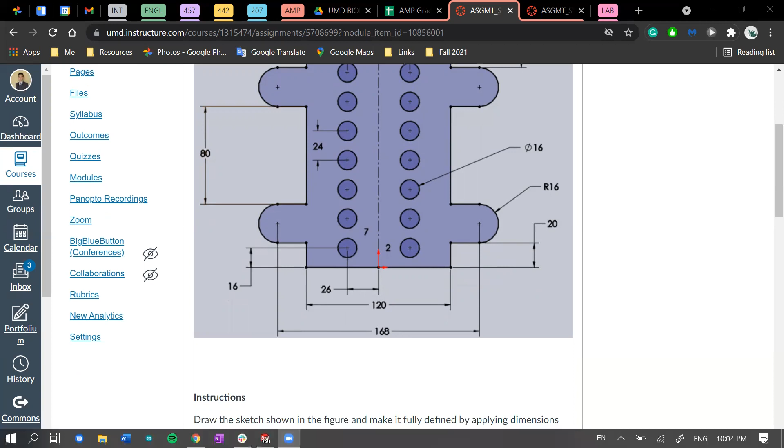Start a sketch. Which plane you choose doesn't really matter. I prefer the right plane or the front plane, just not the top plane for this. There'll be cases where top plane is preferred, but that's for later on.

So again, we mentioned 60. Oh, before we even start, make sure the units of your page, of your environment, is in the proper one. So make sure it's not in inches. Otherwise, you can have a really rough day when you realize halfway through your exam that you're in the wrong units, because the difference between an inch and a millimeter is pretty big. It's just going to screw up your entire sketch essentially. So make sure it's in the right units before you start.

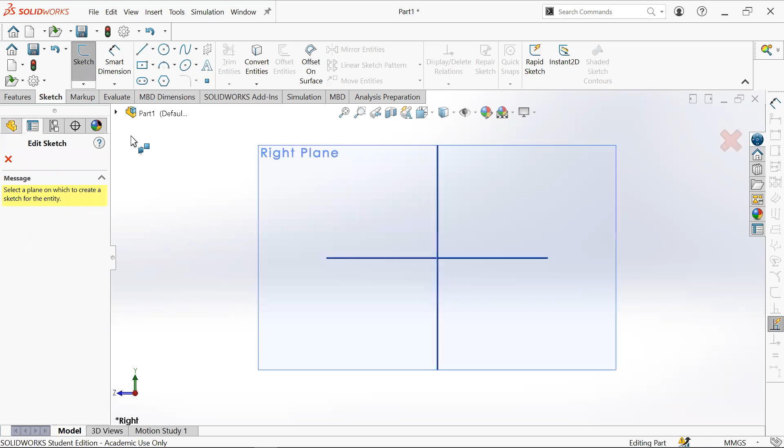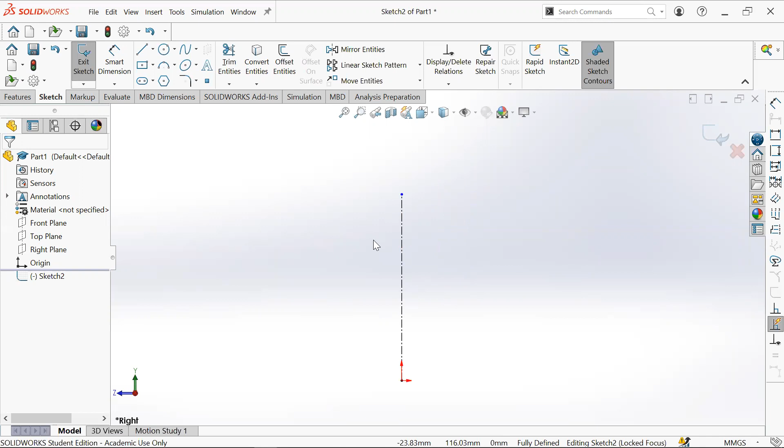And I totally forgot about my own rule even: always start by making your center lines and your construction lines. So in this case, I'll do a center line. Again, you can do center line or construction line. They're about the same, but SolidWorks recognizes center lines as a line that you would use to mirror things. So when you have the explicit intention of mirroring something using that line, use a center line. Otherwise, you can use construction lines. Either way, they don't count as part of your sketch, but you can still make references to it and relate things to these lines.

So let's finally get started with the first line. That's 60, and 60 over, 20 up. All right, escape. Perfect. Now, do you see where the dimension placements are? You want to drag these out perfectly and space them out so you don't confuse these with your actual sketch lines.

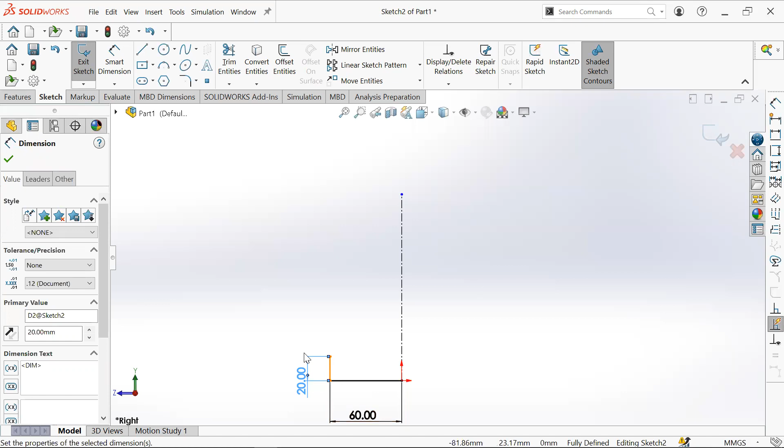Sometimes these lines add up and they can become pretty thick, and you might forget to add an actual sketch line just because one of these lines is giving an illusion that there is a sketch line there. So you want to pull these out so it's not interfering with your actual sketch. Plus, it looks much nicer like this, so it serves two purposes. Let's see how far this goes out.

168, so you gotta do some math here. 168 minus 120 — to get this distance, times 2, right? So you divide that by 2. So 168 minus 120 is 48, divided by 2 is 24. So this is 24 over. And this arc here is 16. All right, so 24 over.

And then 16 for the arc. So a neat trick for the arc is if you pull straight outwards and curve your cursor. If you go straight, once it starts, once it knows that you want an arc, it's hard to change back.

But if you start over, let's pretend we haven't even drawn that line. You can draw basically the entire part here without having to change over to an arc. So you click where you want to start, move out a little bit, choose your dimension, 24, enter. So you're still in the line tool. However, this is only a straight line, right?

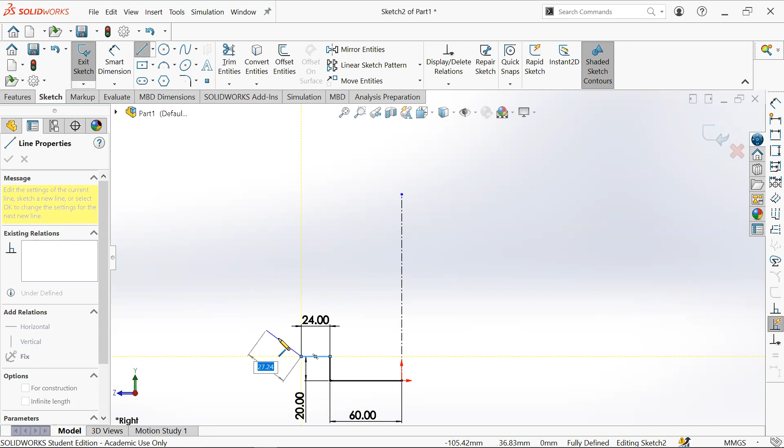If you want a curved arc, you're going to have to pull your cursor back to the starting point and drag out slowly, then curve towards the direction you want the arc to form. In this case, I want the arc to form this way, and you can basically line this point up with, make sure it's vertical to the bottom point, and then fix that dimension to keep that in place. I choose 16.

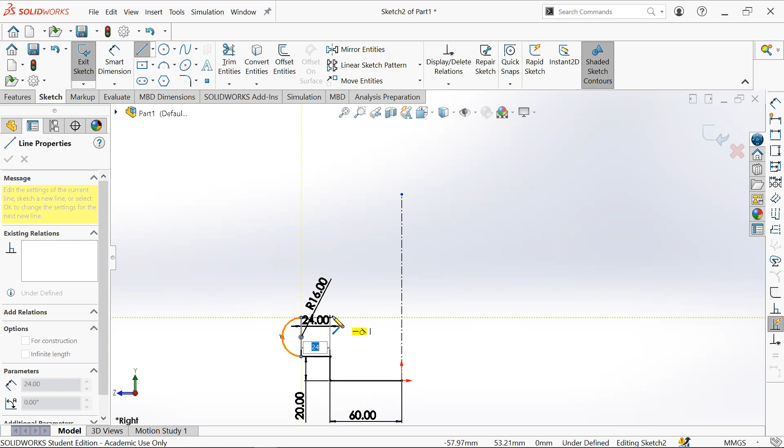And then see, now it's back to a line. So you're still in the line tool, but SOLIDWORKS can tell by the motion you just did, dragging it out and then up slowly, that you wanted an arc in that case. But it's still defaulted to a line tool once you finish that arc.

So again, same distance, 24, and then going up, I think it was 80. Okay, and then out 24. Again, we can always go back to change that distance if it was wrong. 24. Notice how I finished all this using one tool, one continuous motion pretty much.

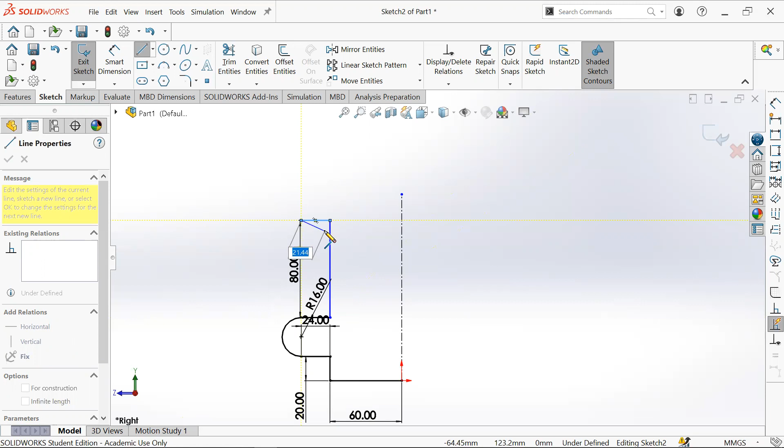So I can go back to this point, drag out, up, one more arc, make sure it lines up. Do you see the dotted line? Boom, boom. The dotted line right below my cursor, the pencil, that's basically saying it's lining up with the bottom, which you want in this case. And then you set dimension again, enter.

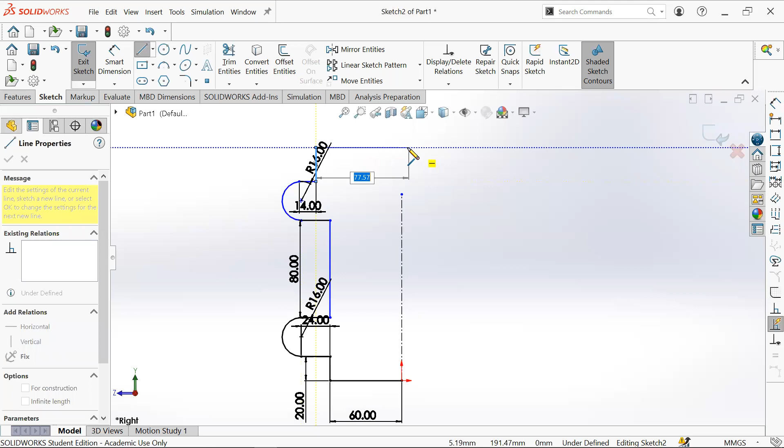Out, 24... 14. Okay, I clicked the wrong number, but up by a certain distance, over by a certain distance. All right, so this is like the rough shape of it. Sometimes it's a good idea to just get a rough shape and then dimension it to become the right shape. There's different ways of doing the sketch, it's just how you prefer, and what you think is the easiest for yourself.

Excuse me, so let's see if this is correct. Okay, so it is 80. We finished this part: went up, over, back, up, over, back, up. Okay, so what's the height of this? 18, so it's not 20, it's not the same as the bottom. Top is 18. So because we haven't dimensioned this yet, we can add 18 here.

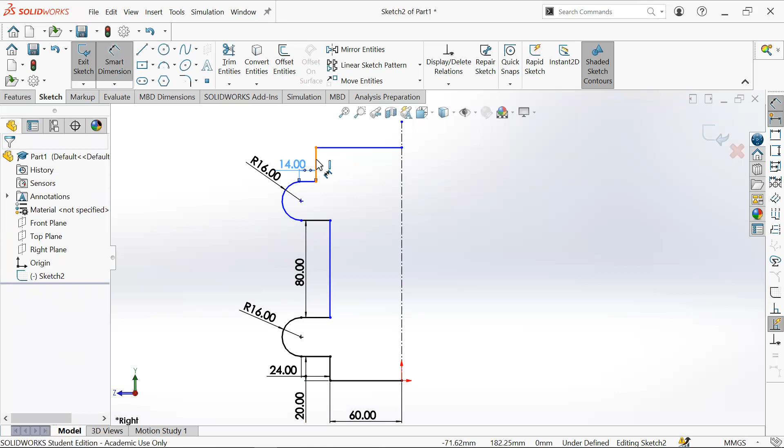Notice how this line and this line, I said 14. I set this to 14 millimeters instead of 24 due to a typo. So we changed that. Okay, now this is much better. Organize your dimensions so it doesn't get in the way of your drawing.

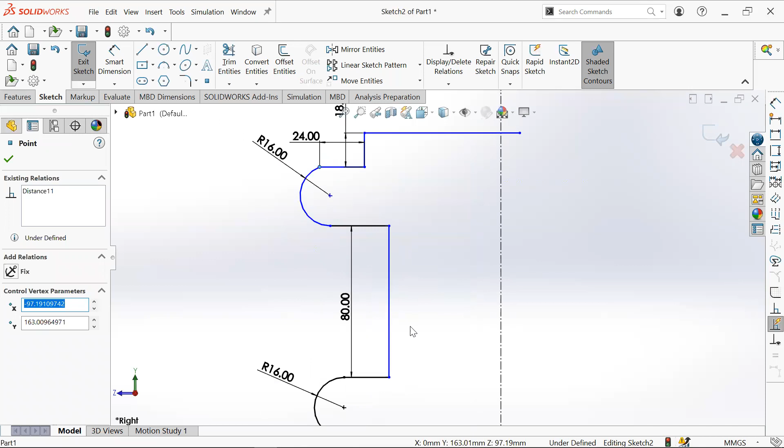This point, okay, so if you're ever confused about why your shape is not fully defined, just click on it and drag it around, and you'll see in what way you'll need to constrain your sketch with that part. In this case, you want this line to be collinear with this line - meaning you want it to be on the same infinite line. So select this line, hold control, left click on the other line you want the relation set with, and hit collinear. Boom, now this is fully defined.

Now, what's wrong with this? Let's see. If you select the arc, all the relations associated with it will pop up as green. As you can see here, this is tangent, and that's what you want in this case, because if you go back to the picture, this is essentially tangent with the center point directly vertically constrained with the two outer points. So essentially you're going from a straight line to a curve, to a perfect curve - that's basically what tangent is. So you select those two, left click, hold down control, left click, tangent.

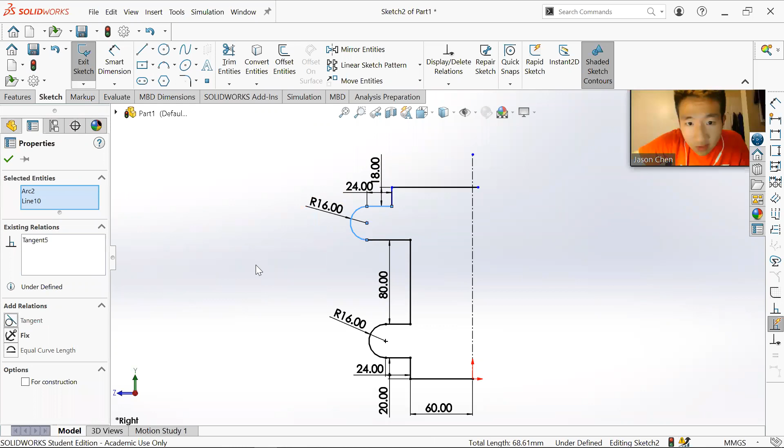All right, so if you're confused as to why this is still not fully defined, drag it. Okay, let's drag that.

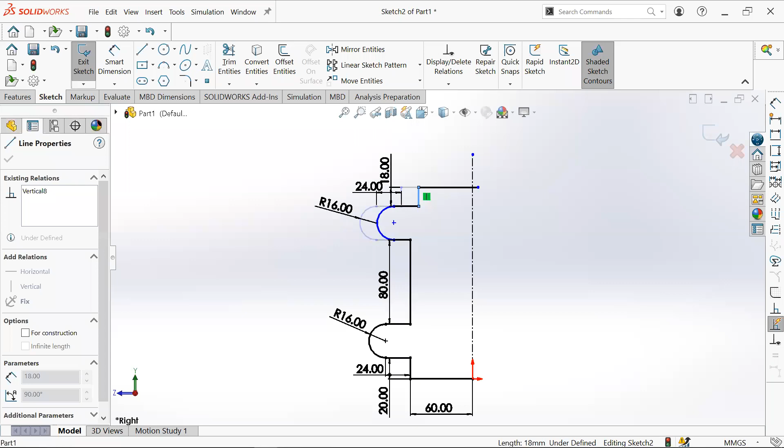So it's moving in and out, that's for sure. Okay, let's fix that first. This line here, the distance between that line and the center line is not fixed. That's why it's moving back and forth. We need to dimension it.

Click that, click that. And that distance is also 60, same as the bottom. That just fixed almost everything. You see this little blue dot here? You have to be careful, you have to be sort of attentive to these things.

If you ever want to make sure whether or not your sketch is fully defined, just look under here and you'll see either fully defined, underdefined, or overdefined. You want to have a fully defined sketch. In this case, this is underdefined, because there's a blue dot here that's not fully constrained.

But going back to this measurement of 60, since these two measurements are the same, you can delete one of them. Left click, hold down control, left click on the other one, set these two to be equal to each other. Now there are two lines with equal lengths.

Now, the thing can still move because this point here, unlike this point, is not coincident with anything. This point is coincident with the origin and the center line. We want this point to also be coincident with the center line. Obviously it can't be coincident to the origin because it's down here, but you want it to be on the same vertical infinite line as this point here.

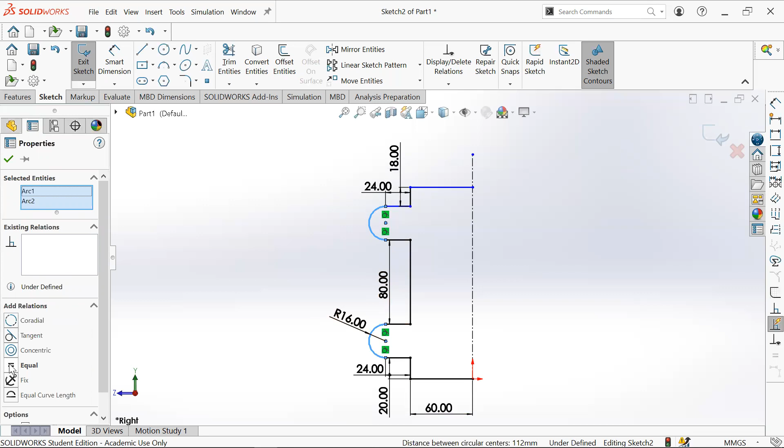You could have basically constrained it by setting a relation between those two arcs, making them equal to each other. That would also fully define these two arcs. Again, there are many different ways you can do one task in CAD, so it's all up to what you prefer, and I guess your style.

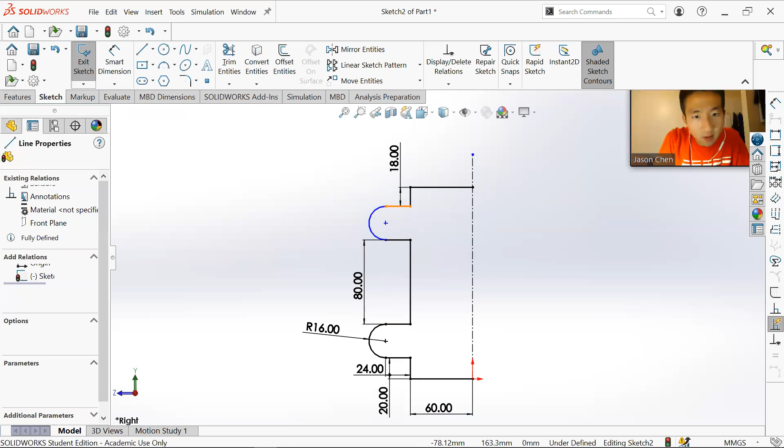Same with here, 24 and 24, that's a repeat, right? You can keep the dimensions there, that's completely fine. But if you prefer, you can left click on that, hold down control, left click on this, and set it equal to each other. It does the same thing—they both are fixed at a length of 24 millimeters.

All right, let's get going with the patterning now. Okay, perfect. So as you can see, even though the center line is not fully constrained, it still says the sketch is fully defined. That's because the center line is not part of the sketch, it's just a reference that your sketch can rely on.

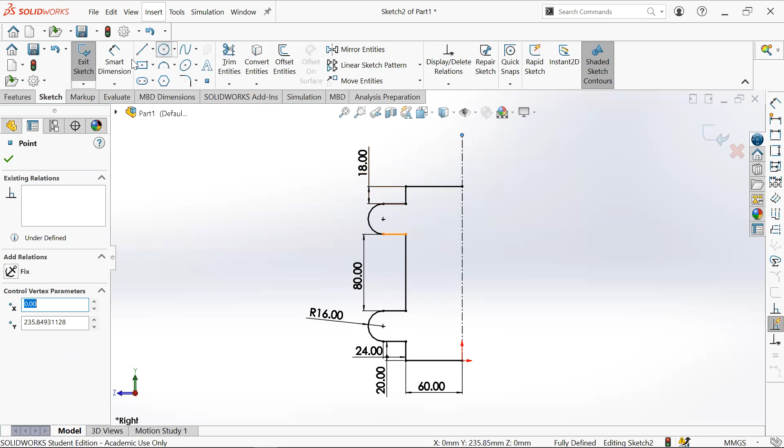All right, so now let's take care of the circle. I believe it was a radius of 16. Okay, let us check. So, okay, diameter of 16, sorry, my bad. Diameter of 16, it's 26 from the middle and 16 from the bottom. Okay, let's do that.

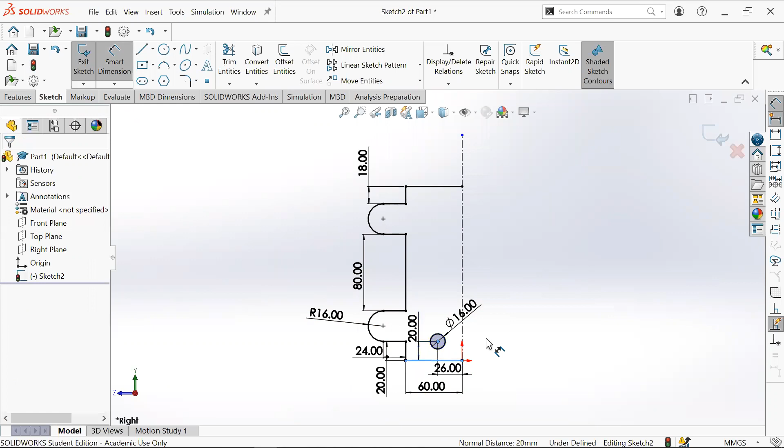26 from the middle. Again, keep your dimensions organized so it doesn't become cluttered, and you can figure out which dimensions belong to which line. And then 16 from the bottom. Okay, so now everything is fully defined once again.

Once the circle is defined, similar to how you will want to fully define everything first before you mirror it across the line, you also want to at least fully define the shape that you are patterning. Otherwise, all of your pattern features won't be fully defined. So fully define the thing you want to pattern first before you pattern that shape.

So in this case, the circle is fully defined, then we pattern it. You can either select the circle first and then hit pattern, or you can hit linear pattern and then go down, select the entities to pattern, hit circle. So you can either do that, or hit the circle and then hit pattern.

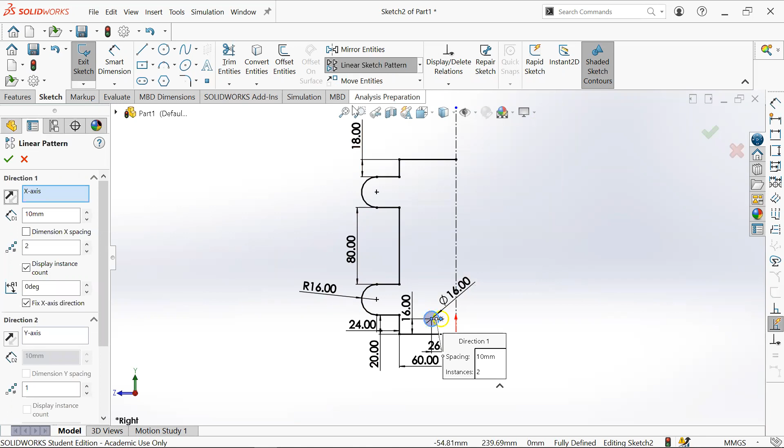Now you can see that the pattern direction is this way, but we don't want it to go that way, we want it to go up. So go into here, look at where my mouse is at right now—it's hovering over this thing called angle, currently at 0 degrees. As I move this direction, the angle changes. So if it's not in the direction that you prefer, you can set an angle offset. In this case, I want it to be 90 degrees from where it started. Now it's facing upwards. This is what you want.

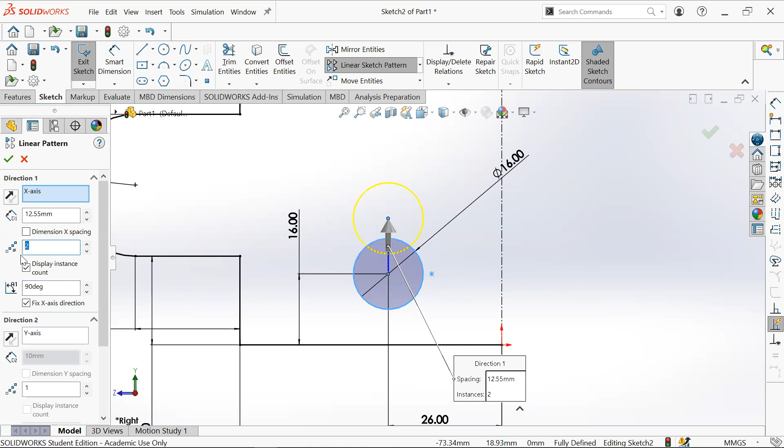Now this is the number of instances, the number of shapes that you want to have at the end after patterning. This number will include your original shape. Since you want to have 7 circles, I'm going to increase the number to 7. Because it includes the original shape, this number here should be 7. The result will be 7 circles.

And as we counted earlier, I think it is 7. As you can see, the number 7 here also says that.

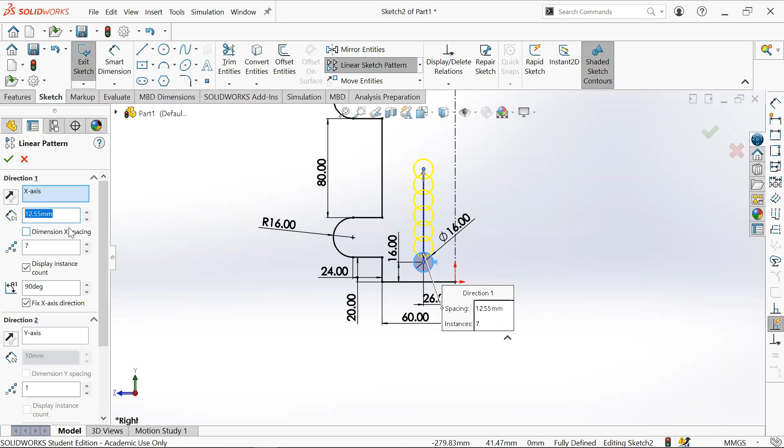Now let's go back to the sketch again and notice the spacing between the center, from center point to center point, is 24. That's where you put it in this input box called spacing. So you put 24, and then you click the edge or the middle to get it to load.

And now you have a preview. This looks basically the same, because it is the same as what the question is asking you. So this is satisfactory. However, before you hit check, you want to make sure this box is checked. If you don't check this box, you won't get fully defined circles after you pattern the circle.

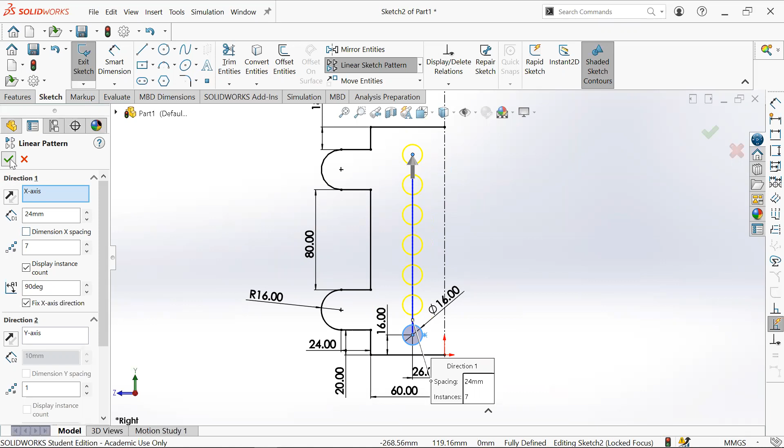So if you hit check without checking this box, dimension X spacing, and just complete your shape now, notice how all these circles are just blue. First of all, they're all blue, and they're not fixed in terms of the spacing.

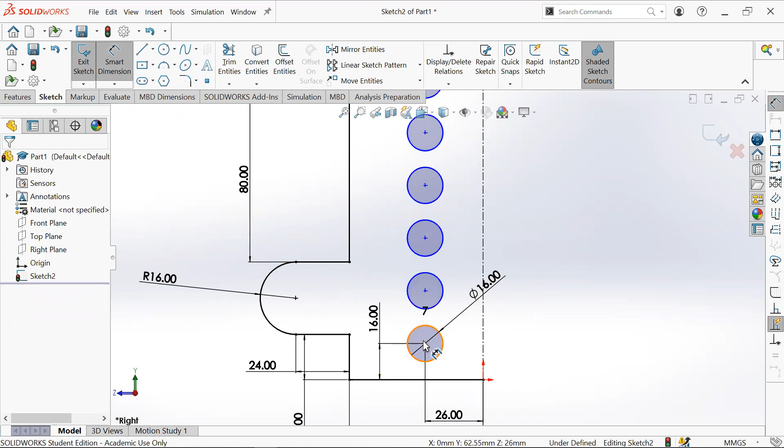So instead of having to do this to fix all of your patterned shapes, you could have just hit dimension X spacing to instantly have this be fixed.

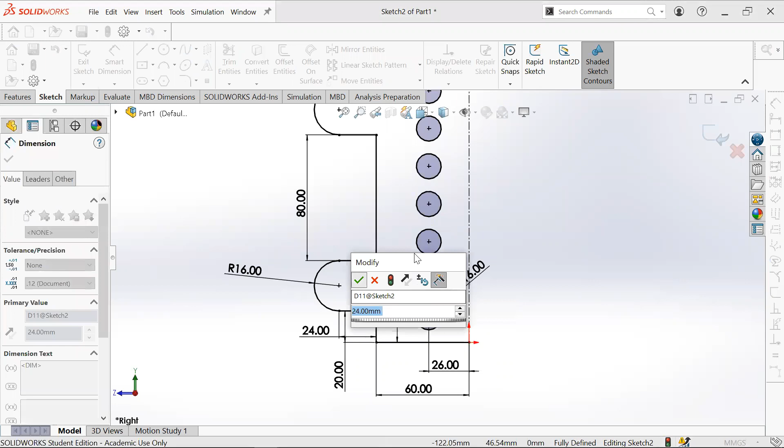So again, patterning is what you would do when there are multiple copies of a shape in a certain direction. You can also do this in two directions, and that would give you, if you want to do 2 rows of 7, you could have patterned 1 over and then 7 up. So it would be a pattern of 2 columns and 7 rows of circles. And again, you can set the spacing from center to center for that case.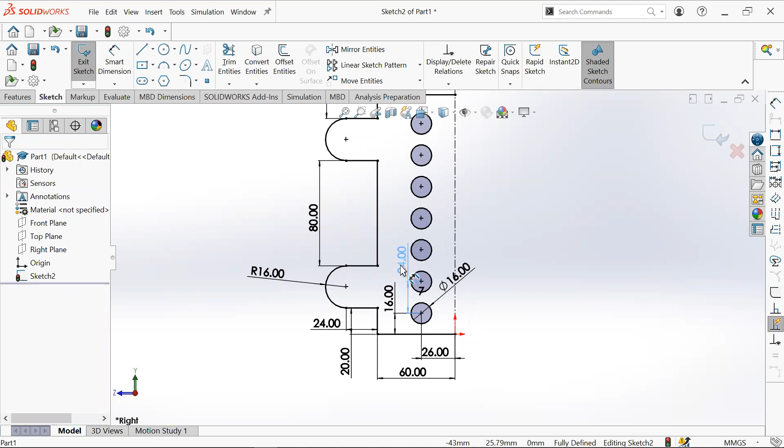So again, it's up to you, but this is much easier than having to create 7 individual circles and then individually dimension them. That would take at least 20 minutes, and you don't have that much time for your exams or quizzes. And it's also just a waste of time in general. So this is a much simpler way.

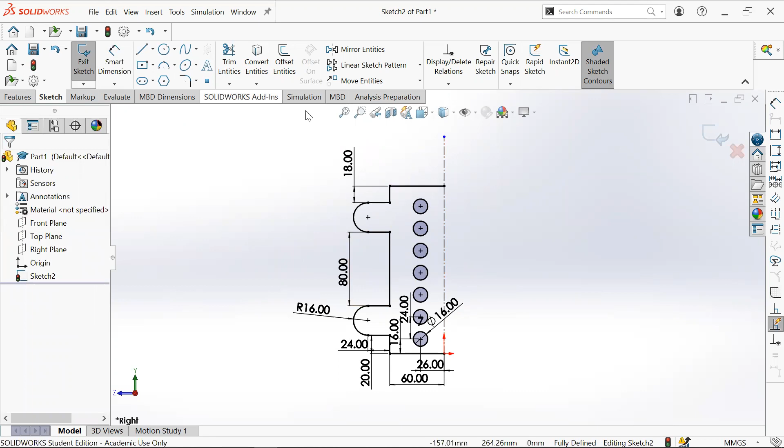So once you're done with everything and you see that everything's fully defined, your last step, most likely, should be to mirror. So you can either select everything, or deselect... oh, whoops.

So you can hold down Control to select and deselect something. I don't want to mirror the mirror line, that doesn't really make sense, right? But everything else, I'm fine with just mirroring over the center line. So I'll deselect the center line, but keep everything else selected. And then I'll hit mirror.

And this will bring up the mirror feature. You scroll down, make sure the box that says copy is checked. And then you select the mirror about input box—not this one, when you select something, it becomes blue. Make sure you are not selecting this box when you're choosing the center line.

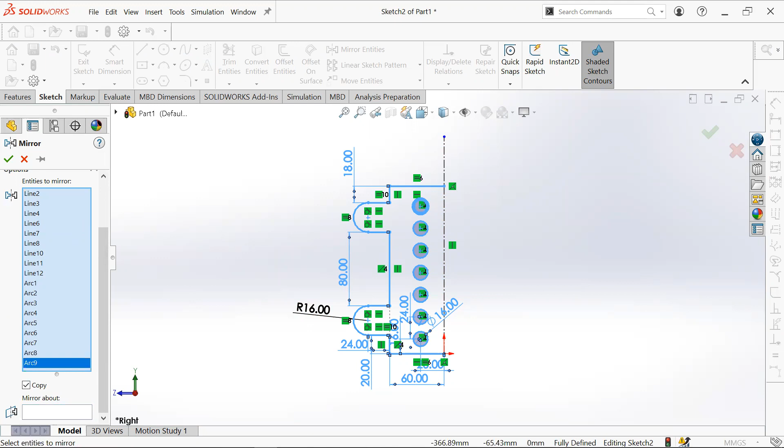You click the mirror about input box, and then you click the center line to make sure it's mirrored across that line. You can choose different lines if you want for different cases. So if I didn't want to go over the center line for some reason, if I want to go over this line instead...

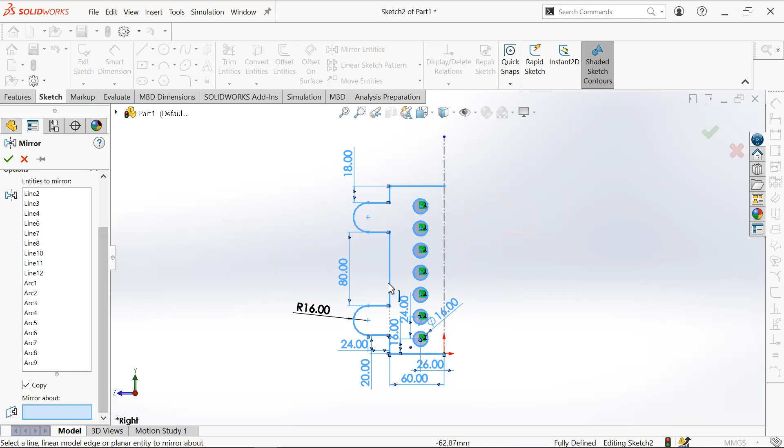There you go. If you want to mirror over this line for some random reason, you can also choose to mirror over this line. But again, it's up to you. So in this case, I want to mirror over this line here.

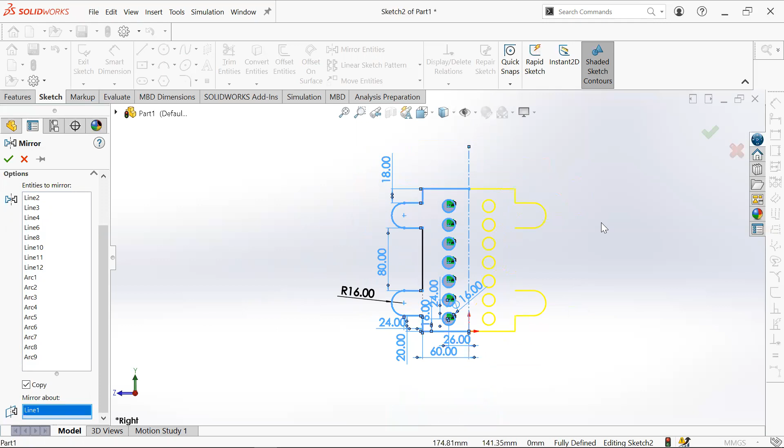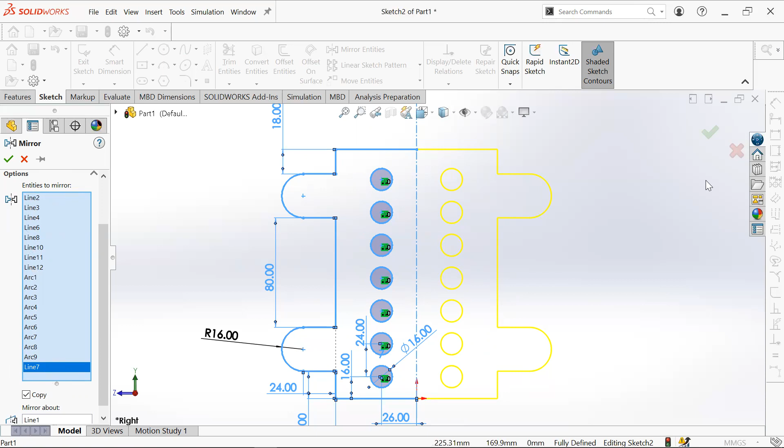Okay, perfect. So you hit this line and almost everything is mirrored. Before you hit the check button, make sure everything you want to mirror is selected. Do you see this gap here? If you just mirror this right now, you're going to have to fill that in. So make sure, while you're at it, it's easier for you to just go back to this box and select this part. Notice how now it's a fully contained shape. So make sure if you're missing something, just go back into this, select the entities to mirror input box, and choose the missing line. So now you're all good and ready to just hit check. And the result of mirroring a fully defined sketch over a center line is a fully defined sketch.

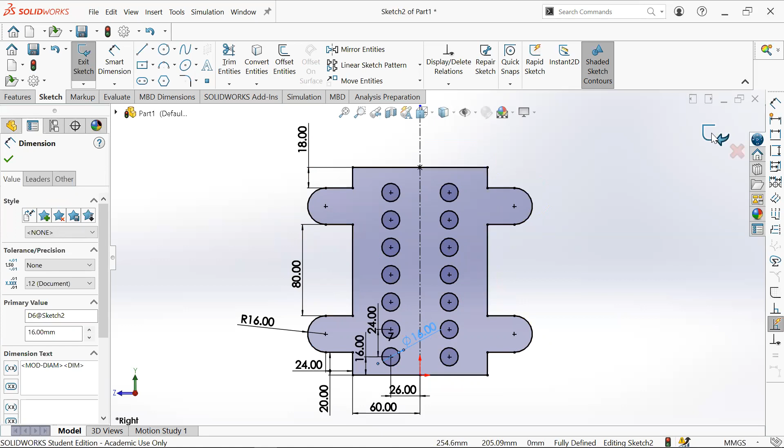And this is your completed sketch. So this would essentially give you full points for the sketch portion of this assignment, or any assignment. However, the homework also mentions that you have to extrude this whole thing by 10 millimeters, right?

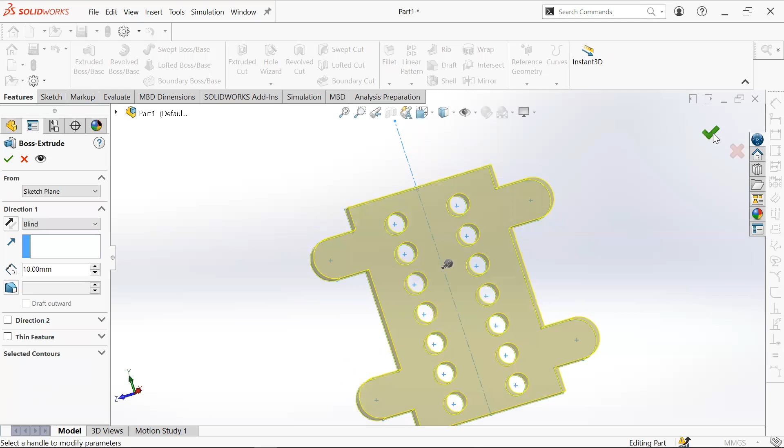So some of you guys, when extruding, did not extrude these individual circles. This is the shape that we were looking for. This is the part that we were looking for. But some of you had some challenges with that.

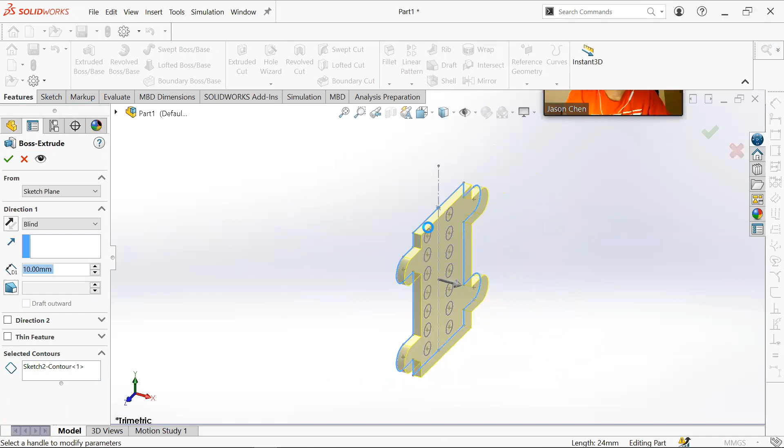So instead of extruding just the space between the circle and the outer sketch, you extruded everything. This will cause you to lose points because anytime there's a shape within a shape, you can assume that we want the inner shapes to be punched out. We want them to be holes, excluded from the extrusion. So we want the inner shapes to be excluded from the extrusion most of the time, unless we explicitly state that it's not.

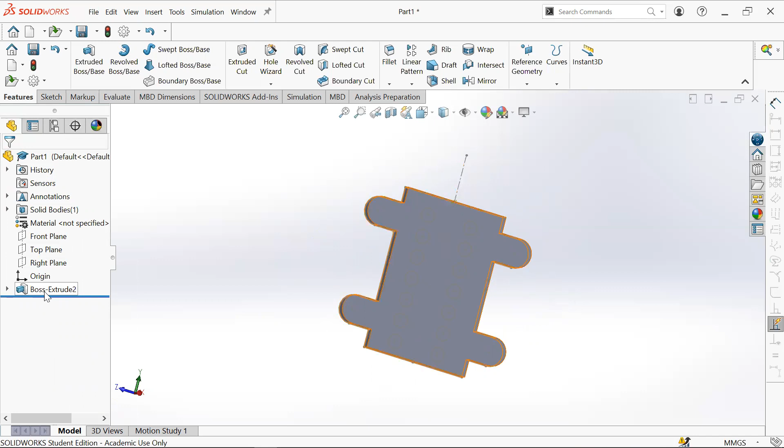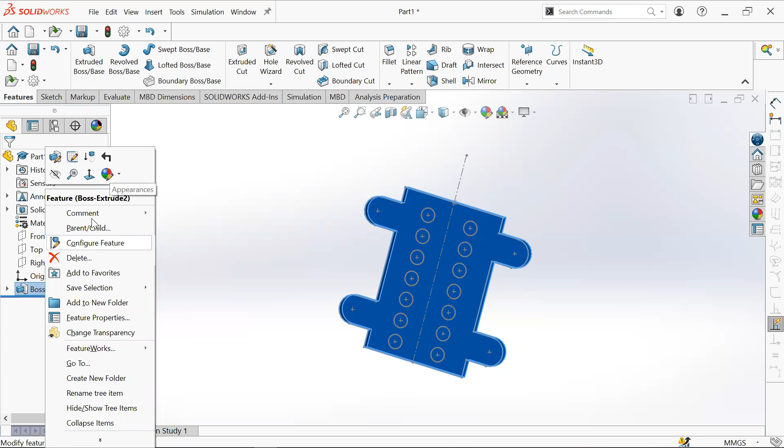So if this ever happens and you hit the check button by accident, you just have to right click on the feature in the feature tree, in the feature manager design tree. You can always go back in and edit the feature. That applies to any other features that you see above—most of these we'll learn later on. So you can change your fillets, chamfers, linear patterns, extruded bosses, revolved bosses, and even more. So go back in and edit.

Now select the selected contours input box, and sometimes you don't have to deselect, sometimes you do—it depends on how you did your sketch. But in this case, we're going to have to deselect all of these. Well, we have to select them essentially to exclude them. That's why it's so confusing when I say deselect, but it's more so like excluding them. Essentially you have to select them to exclude them.

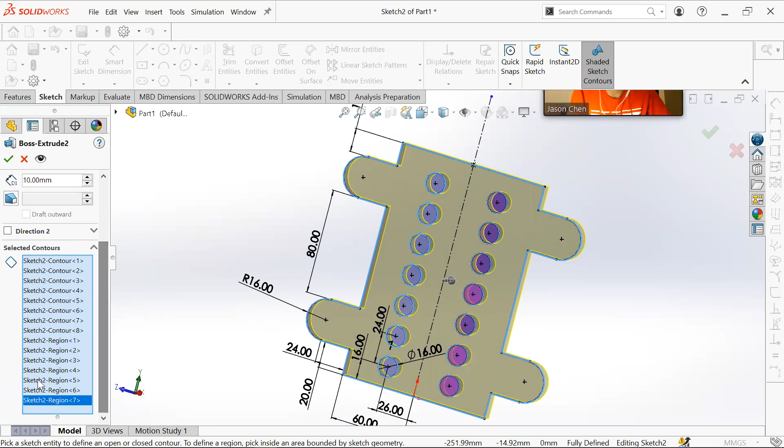So once the preview looks okay, you hit check and done. This is what you want. If you submit this with the sketch that we did previously, you'll pretty much get full points.

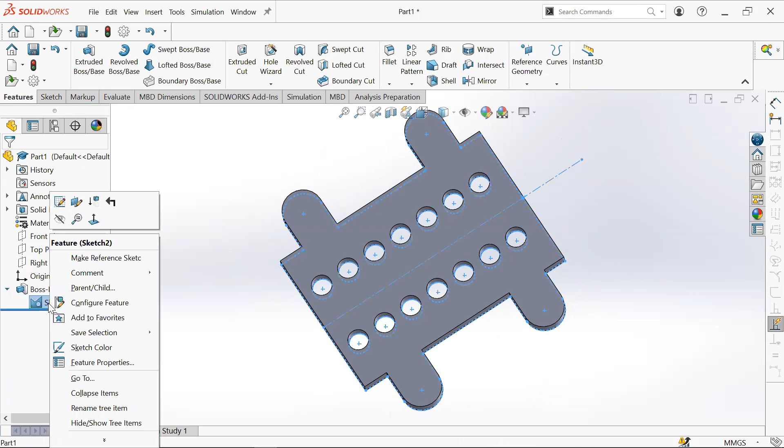Something cool is that you can left click or right click your sketch and either hide or show it. If you hide it, your sketch is now missing from the parts. Right click, show, and your sketch shows up. So this is useful if you ever want to apply multiple features to your sketch.

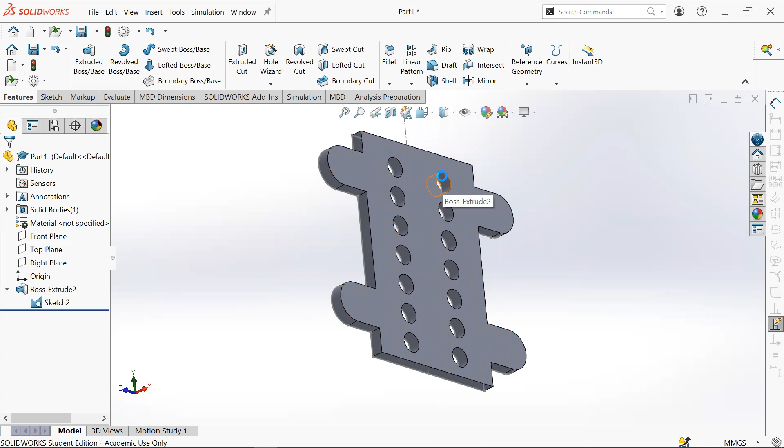So I already extruded my sketch once, right? Usually after I extrude my sketch once, the sketch automatically hides itself. You're going to have to go in and show it. So after my extrusion, the part will look like this—the sketch will disappear. You can't choose a sketch anymore. If you want to extrude more of the sketch, you can't select it anymore. It's missing. So you want to go back in, hit left click or right click on the sketch, hit show.

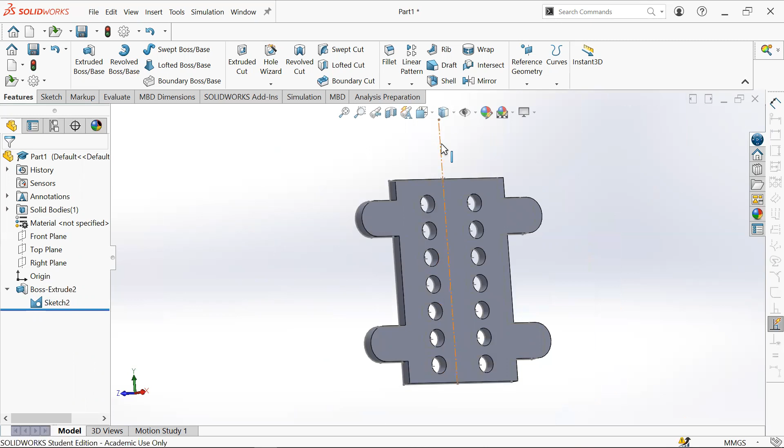Once you have the sketch showing, it's very faint, but if you hover over it, it'll show you the sketch, right? You can see the center line. Now you can go back in and extrude more of the shape for whatever reason.

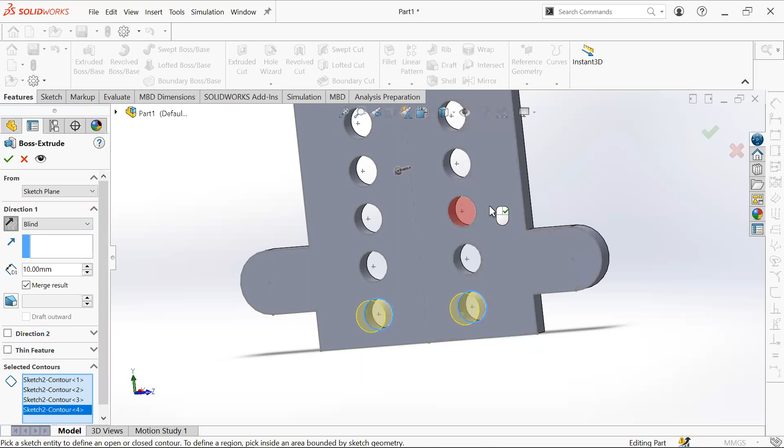Obviously this is not the best example for this, but let's say you want to make sure this is selected to select more shapes. Let's say you want to extrude these 4 circles the other direction. So we reverse the direction, and we get this shape.

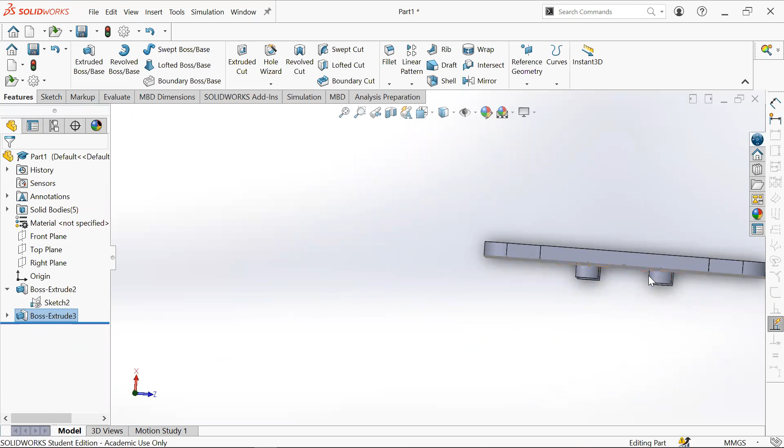So if this was the part that we were looking for on an exam, you're going to have to use the same sketch. Well, you could use a different sketch, you don't have to, but it's easier if you use the same sketch and apply 2 different extrude features to that one sketch. So once this is shown, you can then use that to make your second extrusion to get this funky shape.

And if it bothers you, you can always just hide the sketch again. And now everything looks clean and definitely ready for submission and ready to get your perfect score.